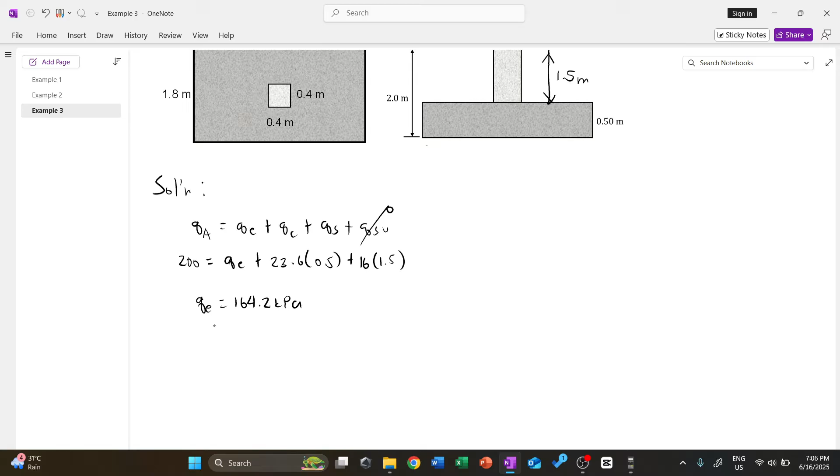Now that we have QE, we can solve for the dimension, the length of the footing. We know that the area of the footing is equal to the service loads divided by QE.

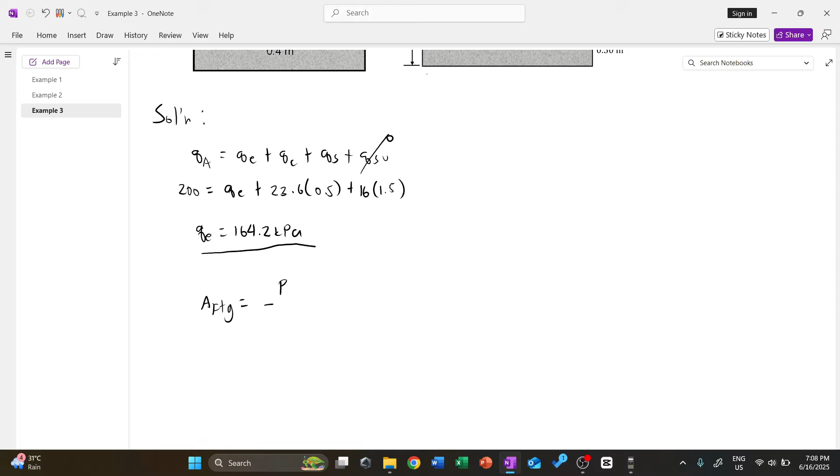Now for the service loads, what are the loads given to us? We have a factored live load of 600 and a total dead load of 600. Since the live load is factored, meaning it was multiplied by 1.6, we remove the 1.6 to get back the service load. The dead load wasn't stated as factored or not, so we take it as is. So this becomes 600 for the dead load plus 600 for the factored live load, removing the factor to get the service load.

Then divide all this by QE, which is 164.2 kilopascal. Now the area of our footing is actually 1.8 times L, so we can equate this too: 1.8 times L. Everything is given except the unknown, the length of our footing. So the length is equal to 600 plus 600 divided by 1.6, divided by 164.2 times 1.8. So L is the only unknown left. The length is equal to 3.29, or simply 3.3. So we can say the length is 3.3 meters. So finally, the total dimension of our footing is 1.8 by 3.3 meters.

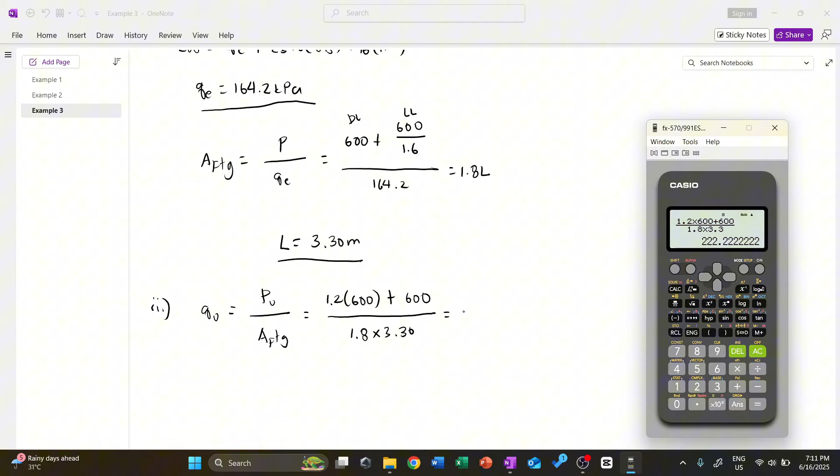Meron tayong 222.22 kilopascal na ultimate pressure. So, using this one, pwede na natin actually kunin yung ating ultimate moment.

So for our ultimate moment, mangyayari ang ating ultimate moment again dito sa face ng ating columns, according sa code natin. Ilagay natin dito yung ating QU, at dito yung mangyayaring ating ultimate moment. Mapuputol yung bandang dito.

Assume natin, lagyan natin to ng label. Say for example, this is n dimension. Meron tayo ditong n distance, at meron din tayo ditong n distance. Isolve muna natin ano nga ba itong n dito. Ilagay na rin natin dito ang length natin na 3.3 meters. Meron tayong length is equal to 2n plus column dimension na 0.4. So, 3.3 is equal to 2n plus 0.4.

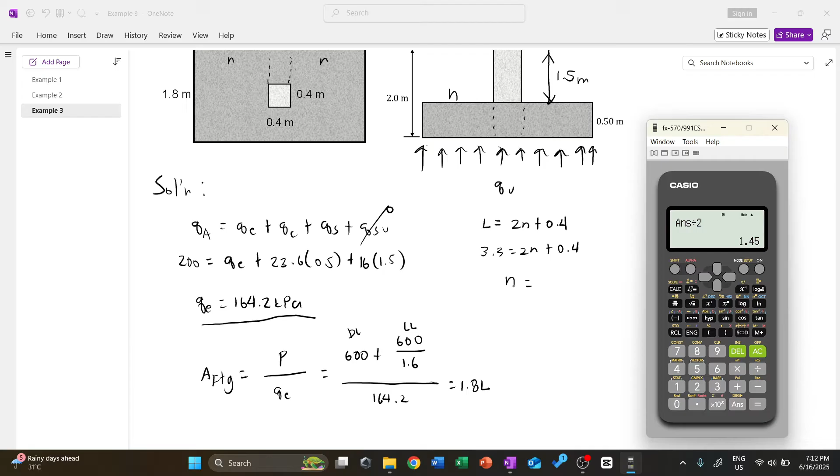Yung n natin dito ay equal to 3.3 minus 0.4, then divide this by 2. So, 1.45. Our n here is 1.45 meters.

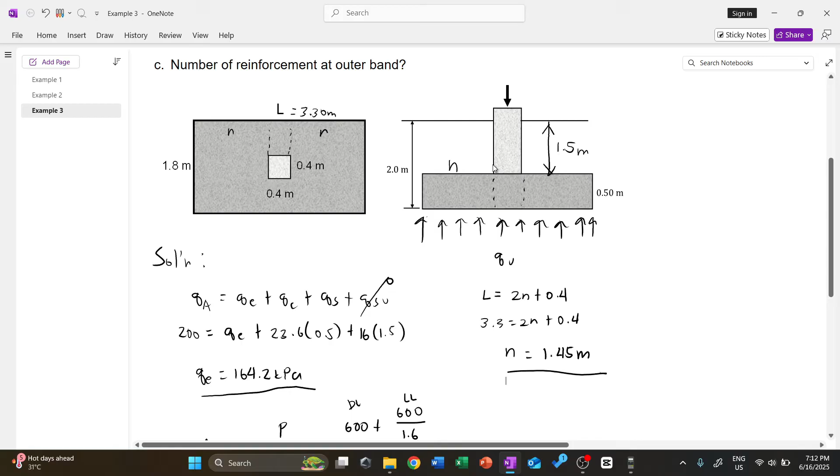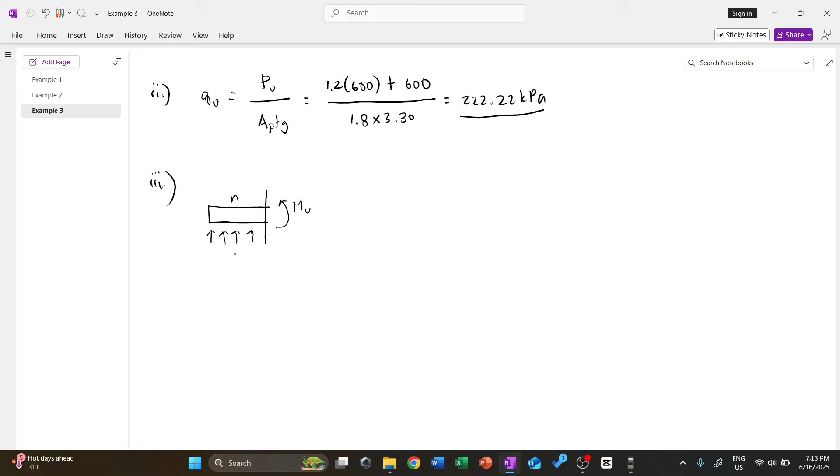Next, meron na tayong n dito. Palabasin na natin yung moment dito sa may critical section. Putulin natin yung ating footing. Ito yung ating n distance. Tapos meron tayo ditong mga QU pressure natin. Tapos meron ditong lalabas na ultimate moment. So sino yung magmo-moment dito? Actually meron tayong resultant na R.

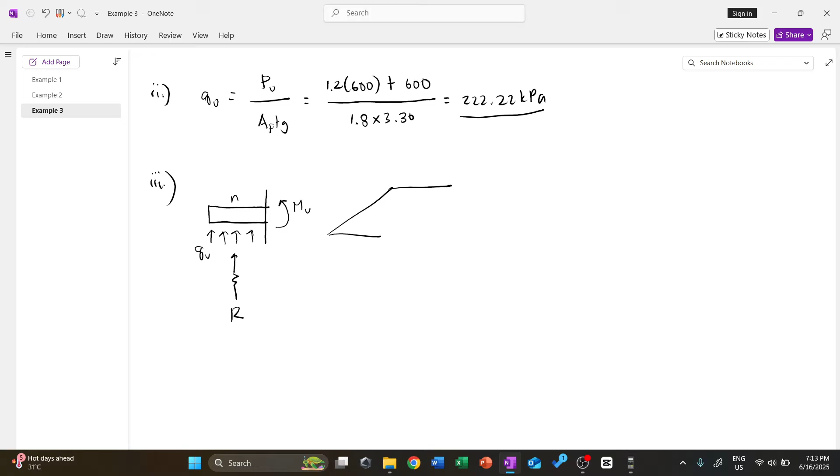Meron tayong R dyan, meron tayo ditong QU. Now the magnitude of R, kunin muna natin yung R natin. Yung R dito, this is simply, i-drawing natin yung isometric na view. Meron dito yung mga pressures natin. Tapos yung ating resultant ay mag-a-act of course dito sa may bandang gitna, sa center netong naputol na ating footing. Mayroong n dyan, tapos yung width ng ating footing ay 1.8.

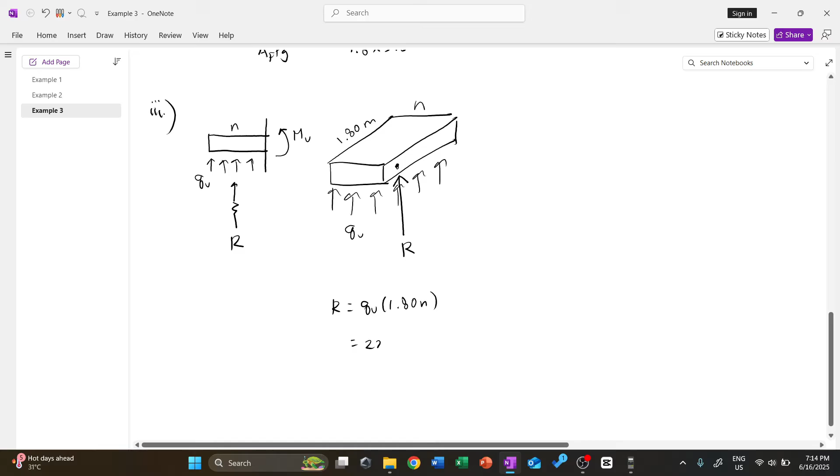Yung R na yan magte-take siya dito sa ating critical section and maproproduce niya yung value nitong MU natin. Now solving for R, this is simply equal to the pressure times the area na nag-a-act, kung saan nag-a-act yung ating QU. Yung area natin ay 1.8 times N. So yung QU natin ulit ay 222.22 times 1.8 times yung N natin na 1.45 meters. Then finally, ang R natin dito ay 222.22 times 1.8 times 1.45.

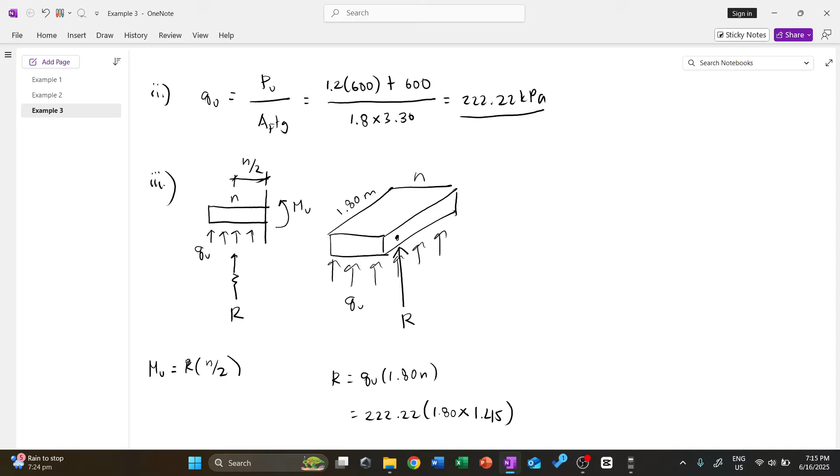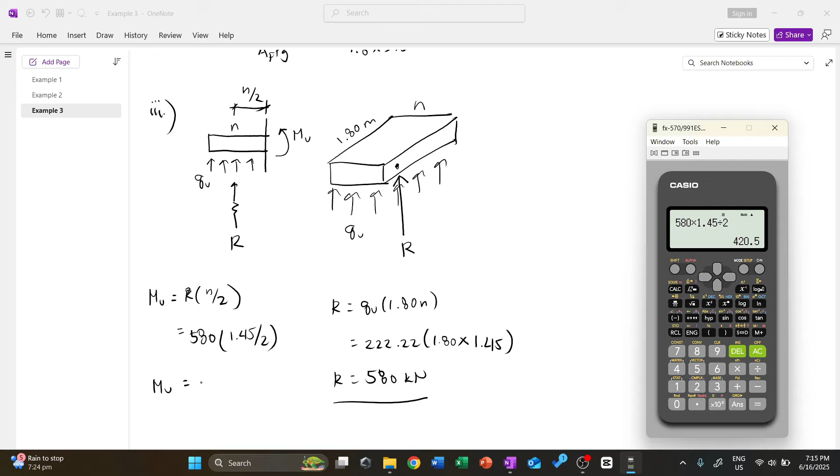Meron tayo dito 579, or 580 na lang. 0.99, gawin na lang natin tong 580 kilonewton. Now yung moment ultimate natin, this is equal to yung R na nagmo-moment dito sa ating MU, dito sa ating critical section. Ang distance or location ng R ay, of course, N over 2, kalahati nitong N, doon nag-aact yung ating resultant R. Therefore ang moment natin ay R times N over 2. Yung R natin ay 580 times N natin na 1.45, divide this by 2, and finally ang moment natin ay equal to 420.5 kilonewton meter. Meron na tayong MU, at pwede na natin actually isolve yung bottom bar natin.

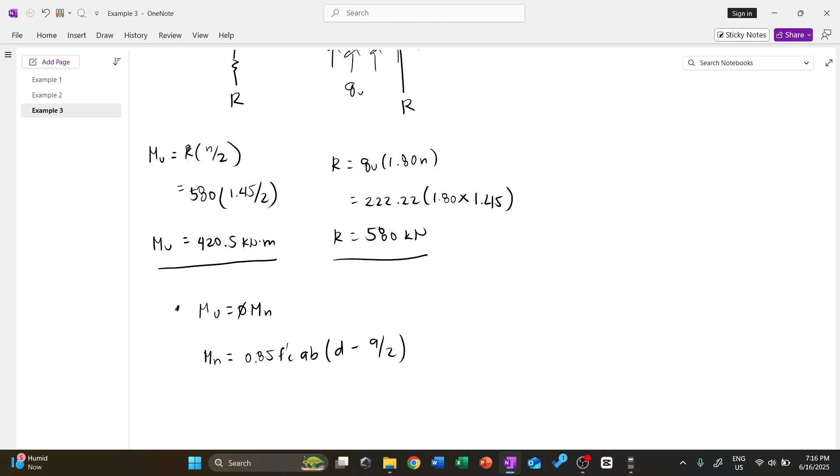Yung bottom bar dito, this is actually the main bar natin, parallel to our length. Next step, dahil meron na tayong MU, pwede na nating kunin yung nominal moment. So MU is equal to phi Mn, pero pwede rin naman natin tong idiretso. Gawin natin ang Mn ay equal to 0.85 F prime C times AB times D minus A over 2. Pwede mong sabihin dito na ang Mn natin, MU over phi, is equal to 0.85 F prime C times AB times D minus A over 2. I-write natin lahat ng given.

Ang MU natin ay 420.5, so gawin natin tong Newton mm. So times 10 raised to 6, divide this by 0.9 is equal to 0.85 times F prime C natin ay 21 times yung A natin is of course yun yung hinahanap natin, and yung B natin dito ay of course itong width. Okay, so dito nangyayari yung moment natin.

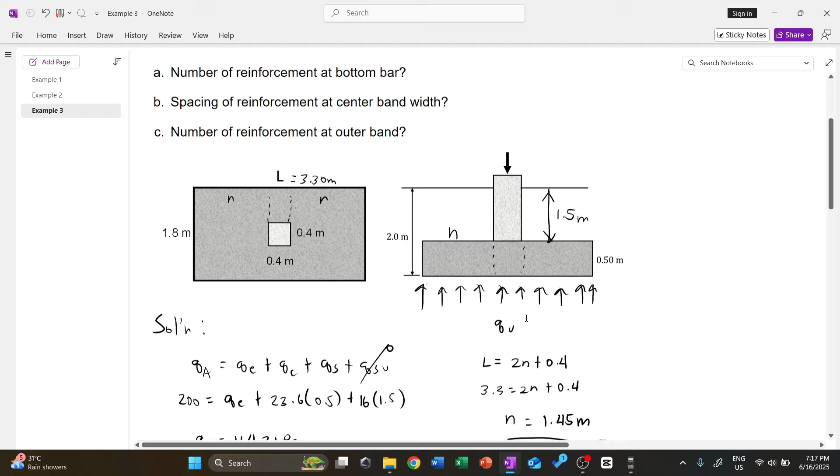So dito yung critical natin for moment. Ang width natin ay itong 1.8 meters, or in mm this is 1,800. Okay, times effective depth, okay, which is actually hindi ata given dito.

Okay, so ang binigay lang sa atin dito ay thickness na 500 mm. Again, recall natin, okay, so kung ito yung thickness natin, ang effective depth dapat para sa MU is again yung nasa bottom bar. Okay, so ang kukunin natin na effective depth ay of course yung nasa center ng bottom bar. Okay, so kung ito yung ating itsura ng ating section ng ating footing, yung thickness natin ay ito dapat.

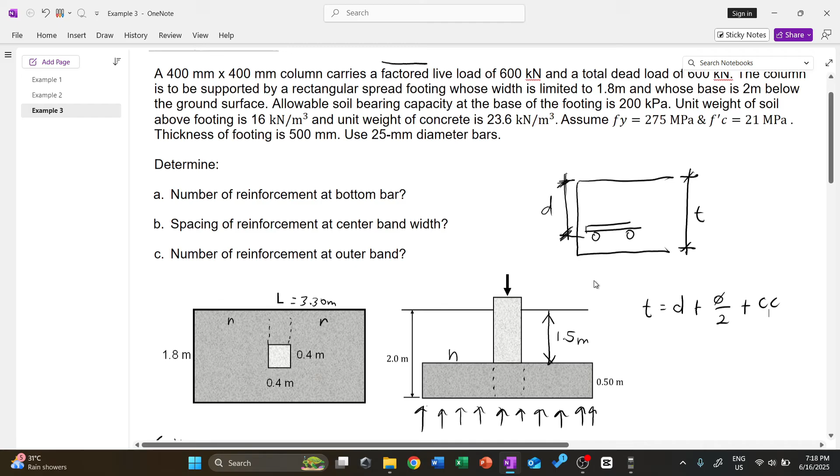Okay, so dapat ang value ng thickness natin, pag ganito, effective depth plus half nitong diameter plus meron pa tayo ditong concrete cover, CC. Okay, so ito yung equation natin. Then we play around this, then kunin natin yung D. Okay, so given naman na dito yung ating thickness na 500 mm. 500 is equal to yung hinahanap natin effective depth.

Diameter of the rebar is 25 mm, so that is 25 divided by 2. Plus, ang cover natin for footing ay we have minimum 75 mm. Wala namang sinabi, so 75 mm.

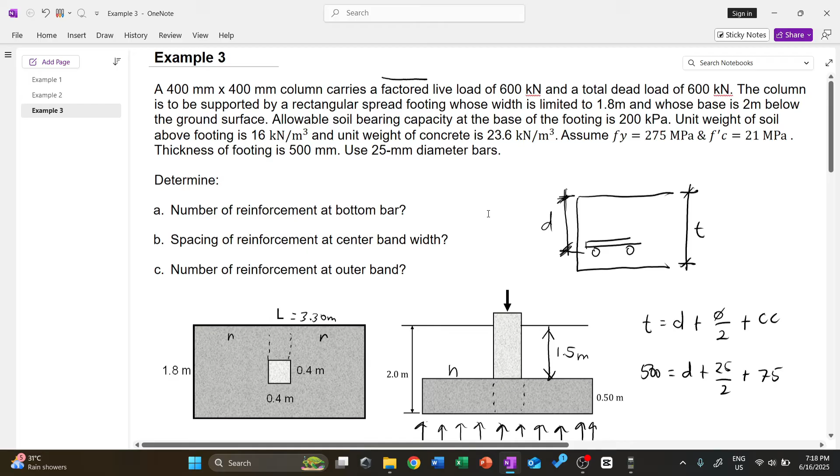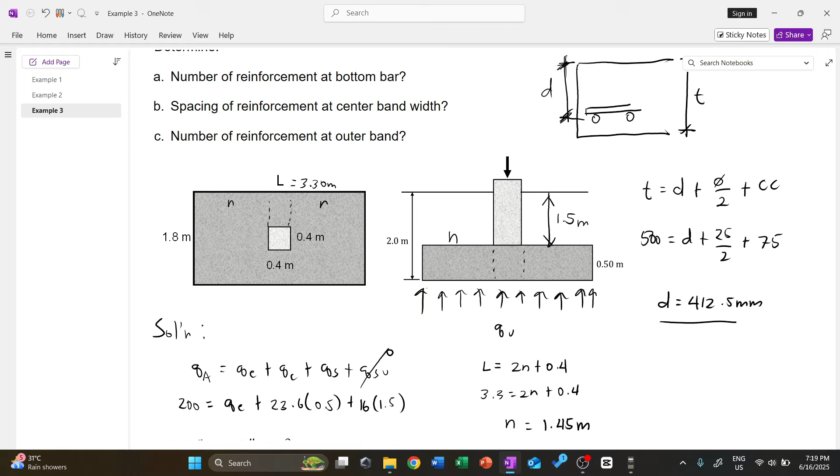Okay, now finally, ang ating effective depth para dito ay equal to, so that is 500 less 12.5 less 75. Okay, so meron tayong 412.5 na effective depth, 412.5 mm. Okay, so pwede na natin tong isalpak dito sa ating equation. We have effective depth na 412.5

Minus A over 2, okay. So pwede na nating isolve yung value ni A. Okay, so para solve natin yung value ni A, simplify muna natin lahat nung pwede nating isimplify. Pagsamahin natin lahat ng mga constant dito.

So 420.5 times 10 raised to 6, okay, divide this by 0.9 times 0.85 times 21 times 1,800. Okay, and then store natin ito sa A. Okay, para mas mabilis, and then meron tayo ditong A.

Recall natin yung value ni A. Equate natin ito, so lahat ng constant, nilipat na natin dito sa left. Then in-store natin yung values nila dito sa A. Okay, so ang naiwan na lang dito sa right equation ay meron tayong A pa rin. So variable x na yan dito.

Tapos, times quantity 412.5 minus, okay, x over 2. Okay, then pwede na natin tong i-shift solve. Then kunin natin ang value ni A, that is 36.90.

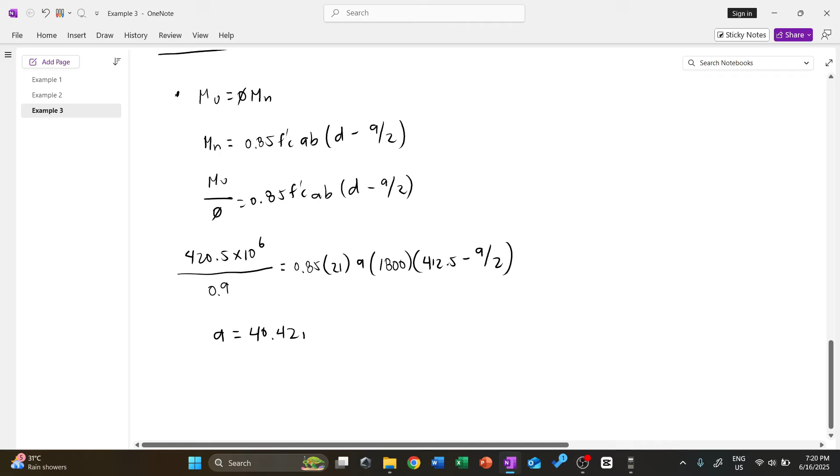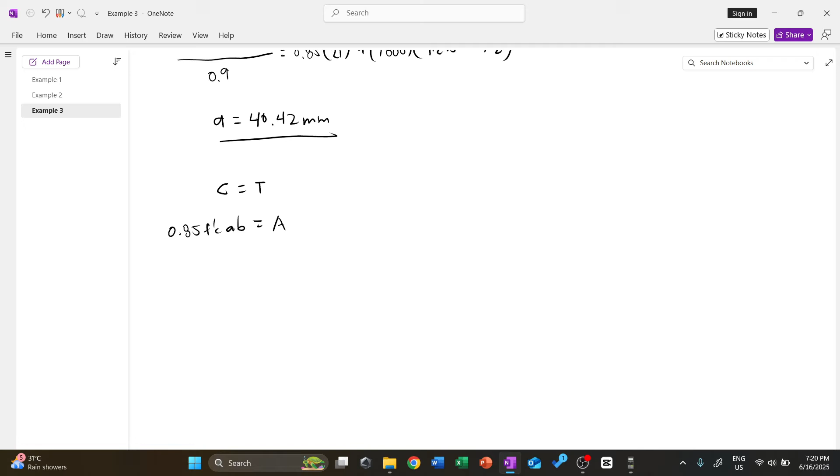40.42 mm. Now, solving for value of A, pwede na natin kunin din yung value nung area ng steel natin. So C equals T, then 0.85 F prime C A B is equal to AS FY. 0.85, 21, 40.42 times yung width natin ay 1,800 is equal to AS times yung FY natin na

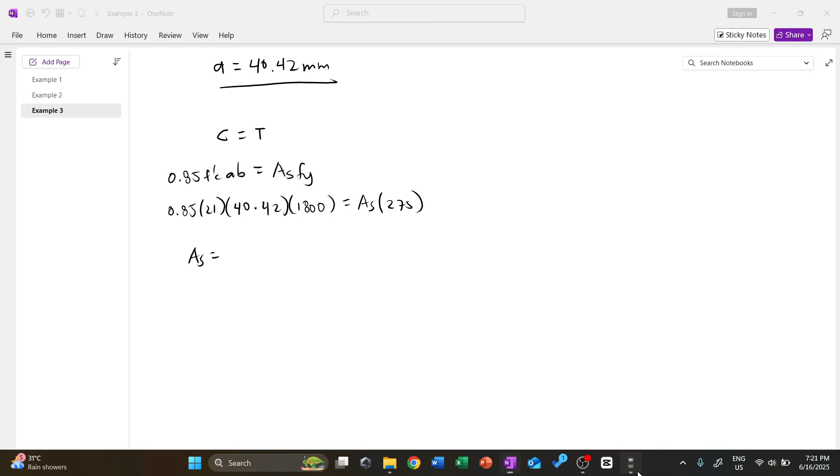275 MPa times 275. And then finally, ang AS natin ay equal to, so 0.85 times 21 times 40.42 times 1,800, divide this by 275. Then we have 4555.85.

4555.85 mm square. Now, hindi pa to yung final na answer. We need to check the minimum area. So, our AS min here, check lang natin kung ano ba yung value ng F prime C natin. Now, yung F prime C natin dito ay 21.

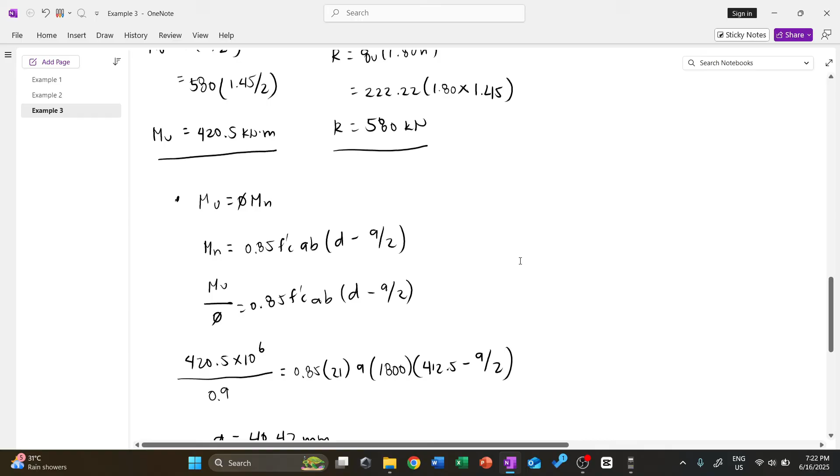So, meaning, ang gagamitin natin na AS min ay yung 1.4 over Fy times BD. Okay, so 1.4 divided by Fy natin na 275, B natin 1,800 times effective depth natin na 412.5. Minimum area natin ay equal to 1.4 times 1,800 times 412.5 and divide this by 275. That is 3780 mm square.

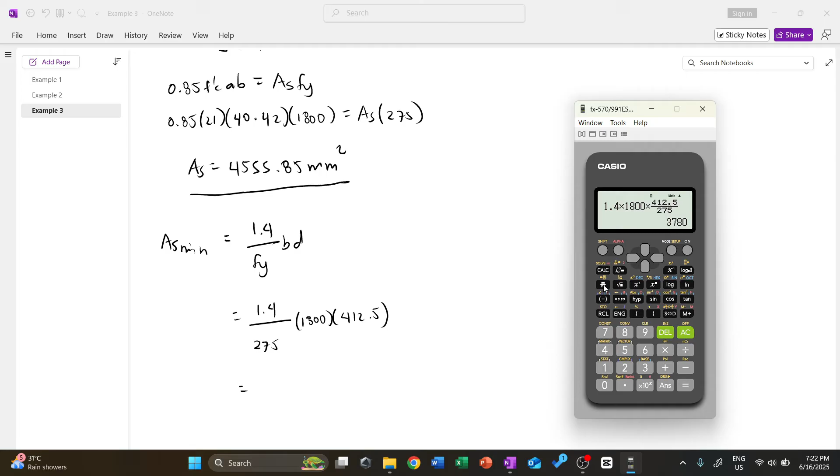3780 mm square. Now, between the two, ang mag-govern na area ng steel ay yung mas malaki, 4555.85.

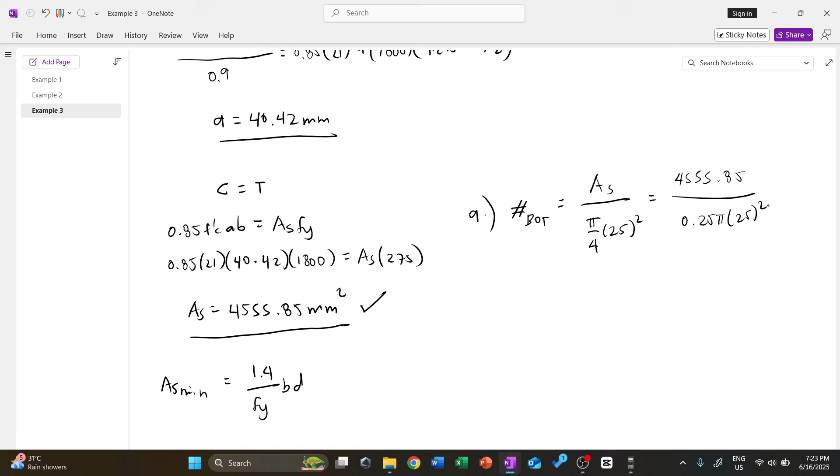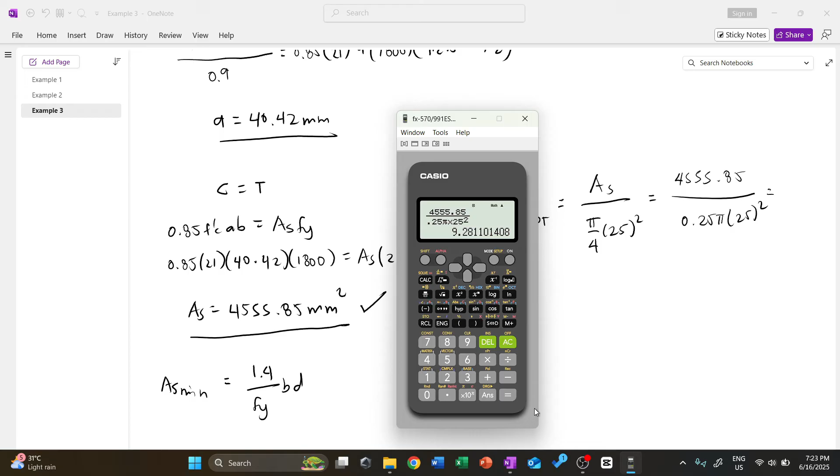Okay, so this is equal to 4555.85 over 0.25 pi times 25 square. Okay, so 9.28, or 9.9, or 9.2, kahit ano, 9.2 or 9.28. So round up natin ito. This is now 10 pieces.

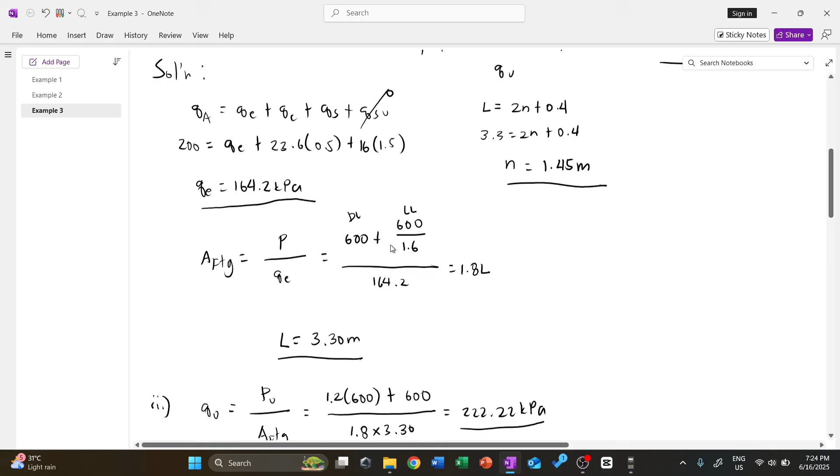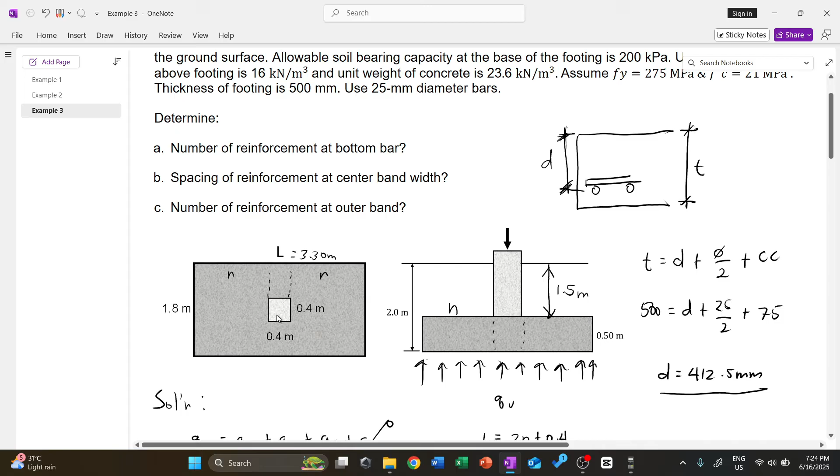Okay, next item: the spacing of reinforcement at the center bandwidth. So for the spacing of the center bandwidth, our rule again is to measure the equivalent width, measuring from the center of the column. We already have a prepared setup here.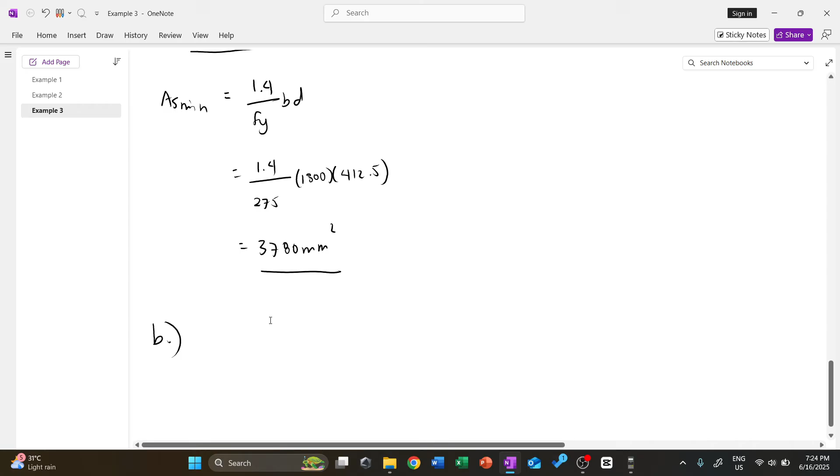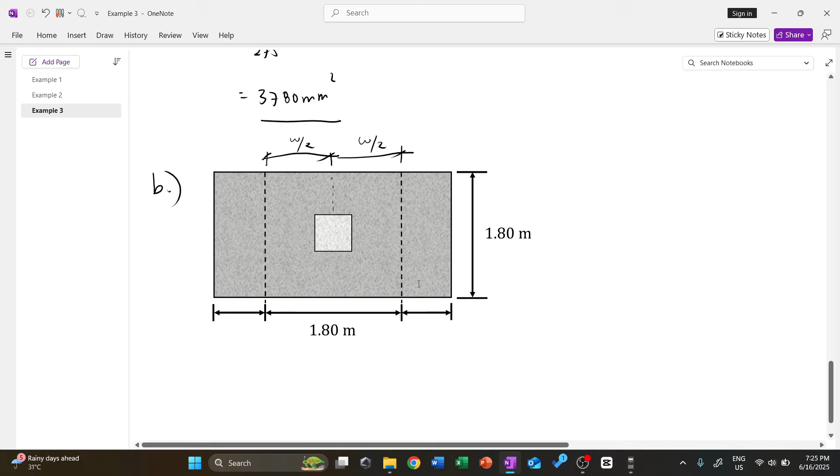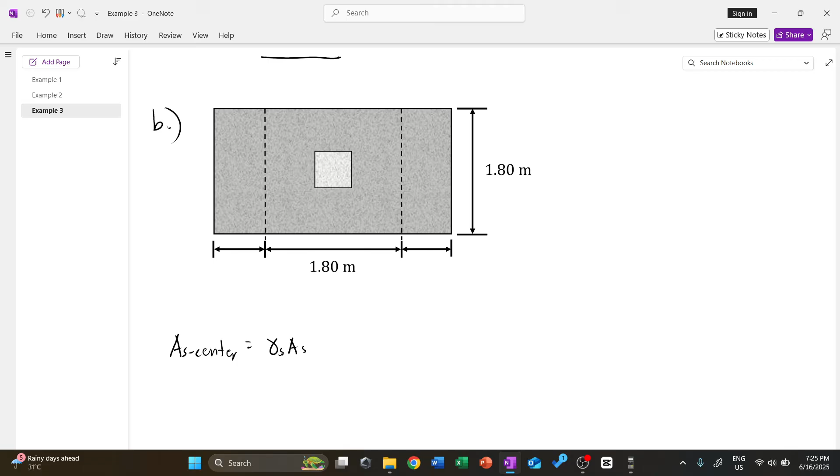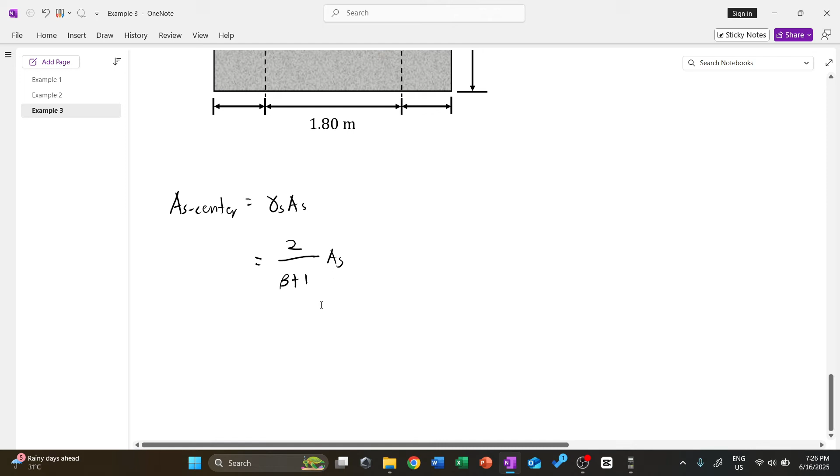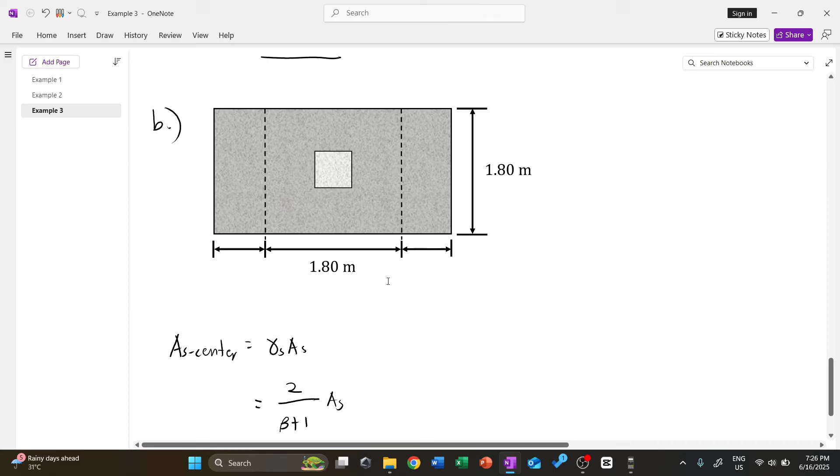And what is beta again? Beta is the length of the footing divided by the width of the footing. So the length of our footing is 3.3. Divide that by 1.8.

So let's substitute everything. AS center is equal to 2 over (beta, which is length divided by width, plus 1) times area of steel, which is 4555.85. So 2 divided by 3.3, divided by 1.8, plus 1, times quantity 4555.85. Then we get 3215.89.

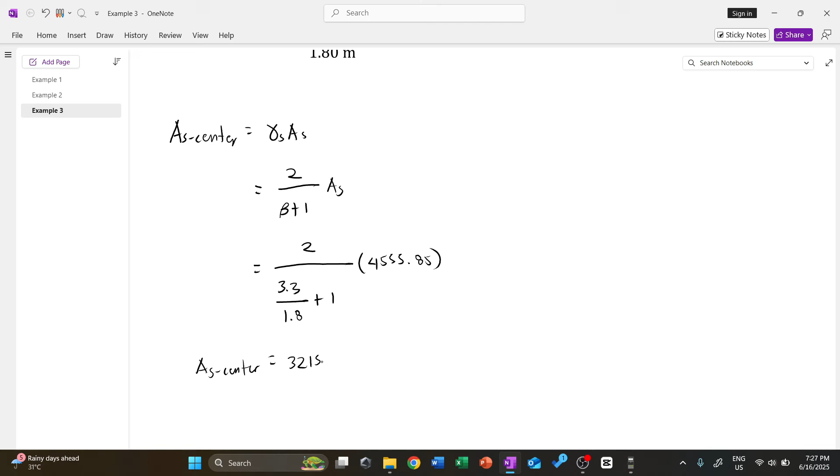3215.89 mm square. So after getting the area for the center band, we can now get the number of reinforcement at this center band. Number of rebars at the center is AS center divided by area of 1 bar. Top and bottom, we'll use 25mm diameter since no other diameter was stated.

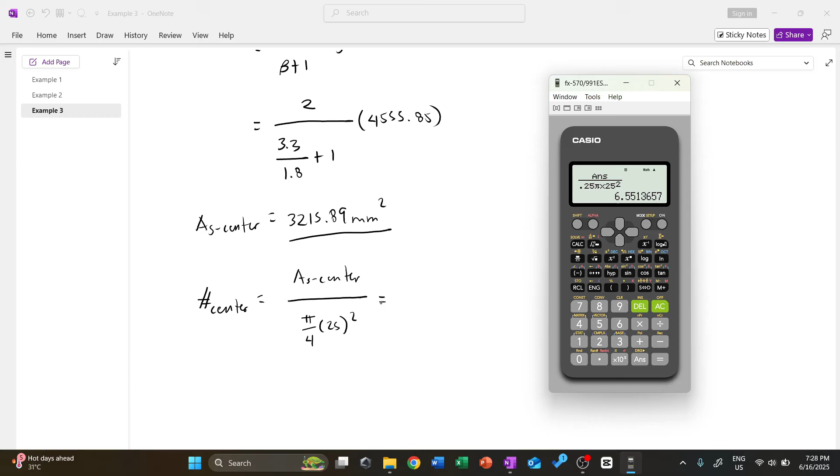So now let's get this: answer divided by area of one bar gives us 6.55 pieces. 6.55, or the number of rebars at the center, is actually 7 pieces.

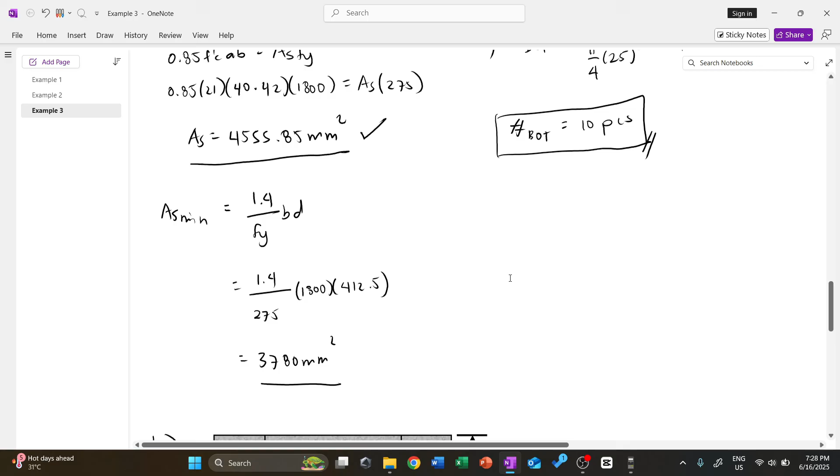To know what the spacing of our steel bars in the center band will be, let's first draw the cross-section view, or elevation view, of our center band. So again, this is the 1.8 meter center band.

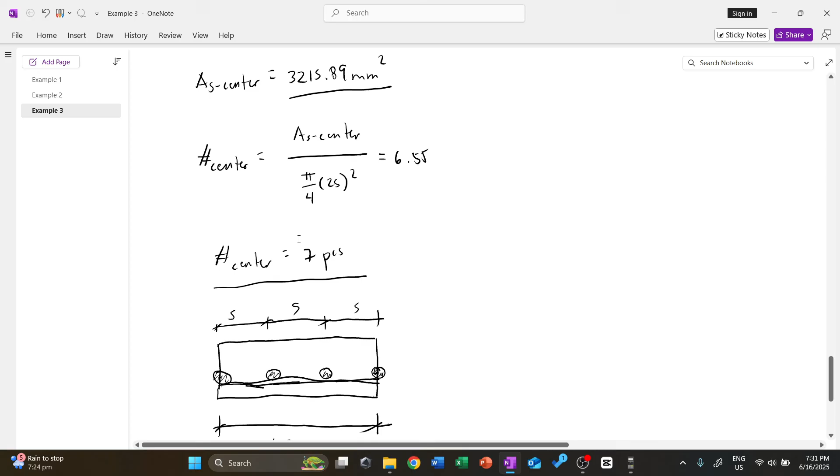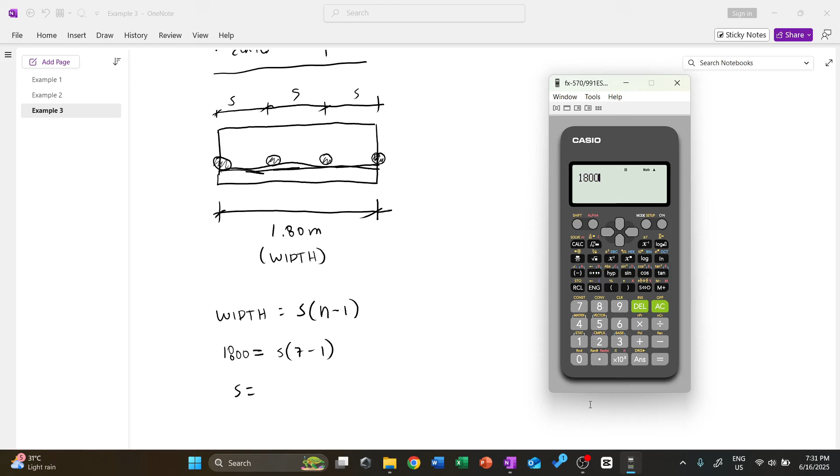Now let's substitute our width. So 1,800 equals the spacing we're looking for times n, which of course is not 4, this is just a sample. The value we got earlier is 7 pieces, so 7 minus 1. Finally, our spacing equals 1,800 divided by 6. So our spacing is 300 mm. That's what our spacing will be.

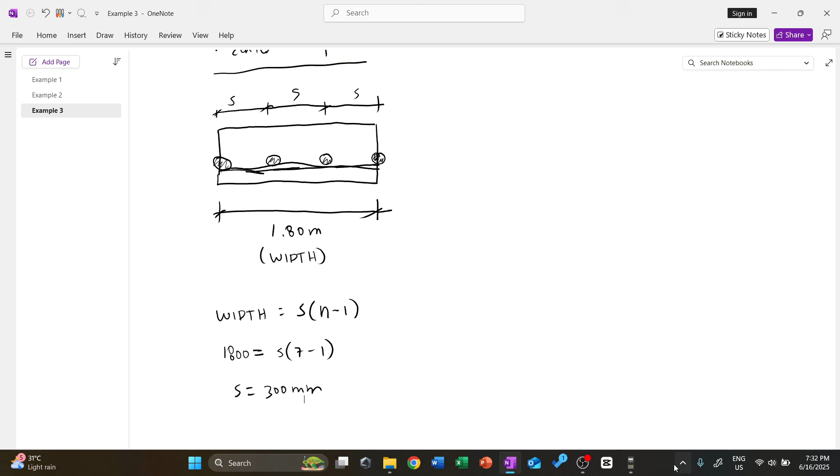But let's check first, this isn't the final answer yet. Remember we have a maximum spacing. The maximum spacing for top bar for two-way footing is 3H or 450 mm. The 3H here is 3 times the thickness of the footing, which is 500, so this is 1,500 mm. Between the two, 450 mm governs. Then we compare that 450 mm to the spacing we solved, 300. And 300 is less than 450, so we can box this as our final answer. The tighter the spacing, the better.

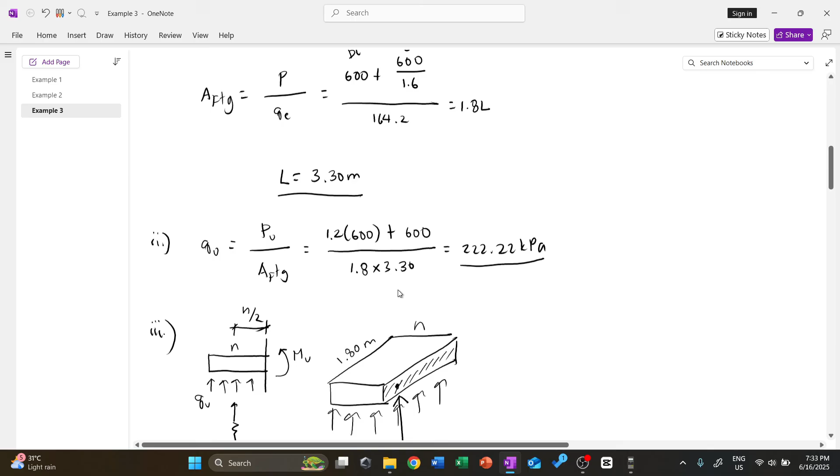Next, the last item: what is the number of reinforcement at the outer band? For the outer band, to get this is very simple. Our formula for outer is simply 1 minus gamma s times AS. Direct substitution here: 1 minus 2 over beta over L, beta plus 1. So our beta is 3.3 over 1.8 plus 1, times our AS, which is 4555.85. We can now use this.

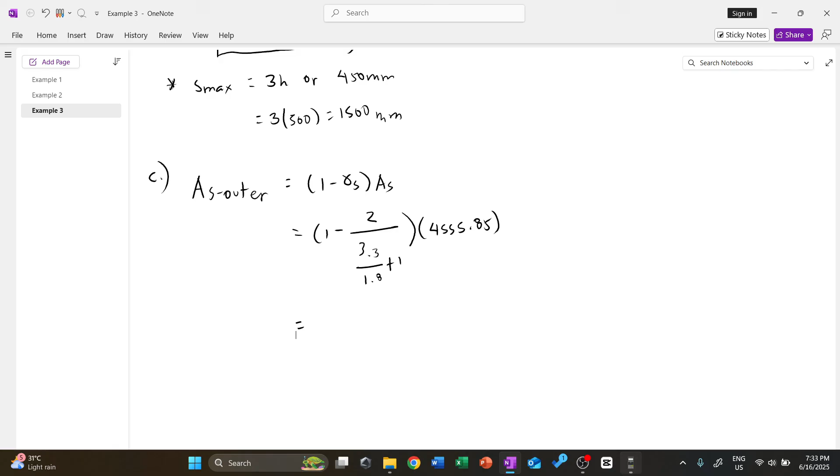So 1 minus 2 over, 3.3 over 1.8 plus 1, times 4555.85. We get 1339.96 mm squared. So this is the area of our outer.

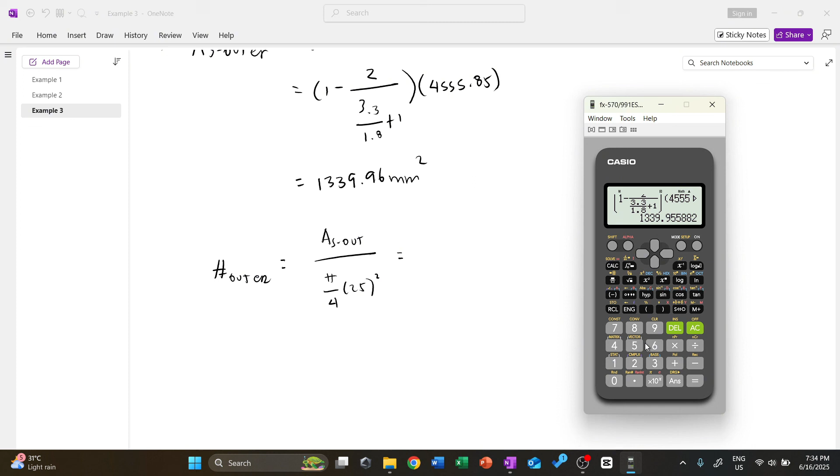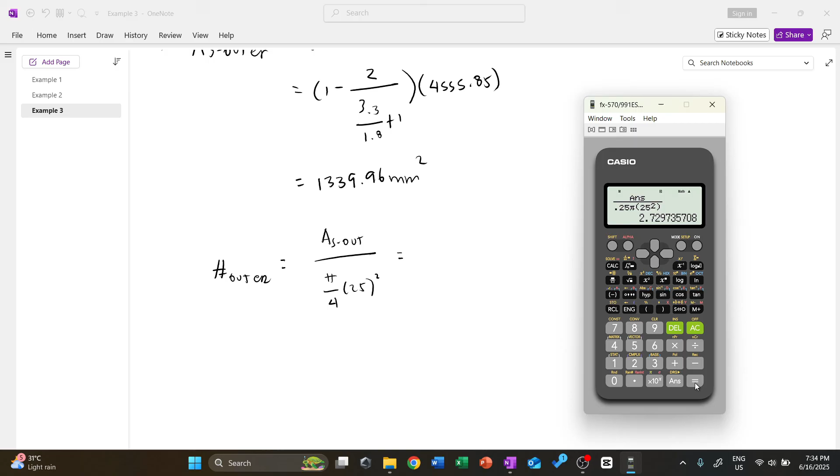Now we want to find the number of bars in the outer. That is AS out divided by the area of 1 bar. Again, we'll use 25 throughout. So 1339.96 divided by 0.25 times 25 squared. Finally we get 2.73, so the number of outer bars is simply 3 pieces.

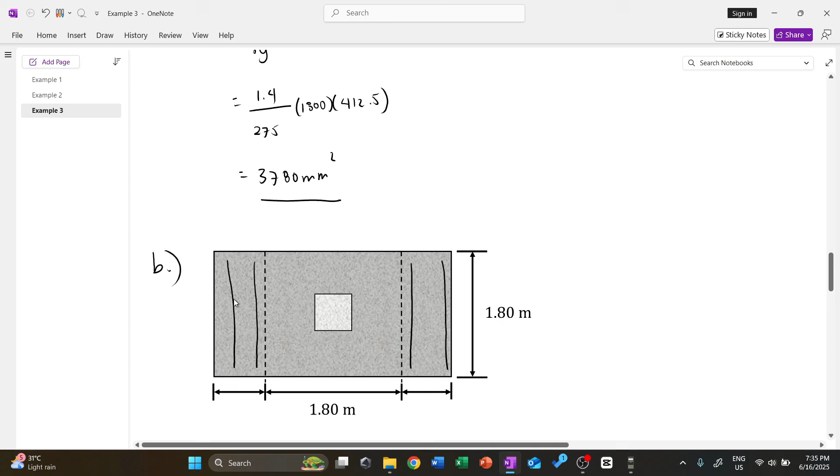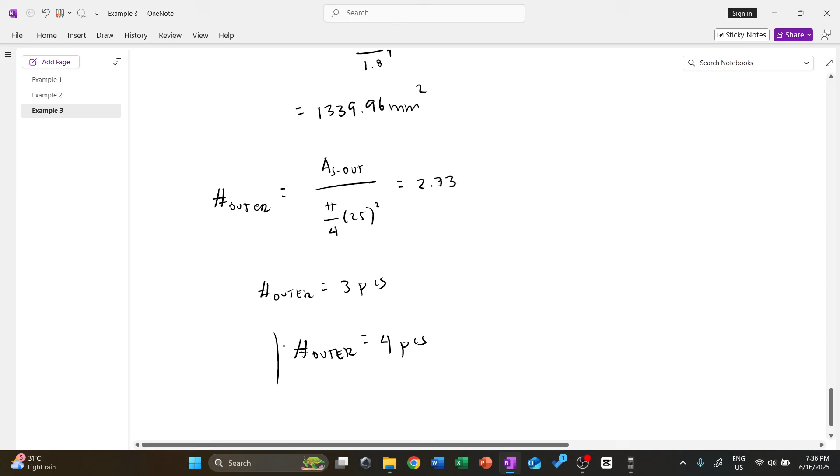For this one, 3, if you divide that between left and right, you get 1.5 on the left and 1.5 on the right, which is wrong since we don't have half a bar. So what we do to make it even is make this 4 pieces. We round up. This will be our final answer.

Alright, so that's our axial load isolated footing.